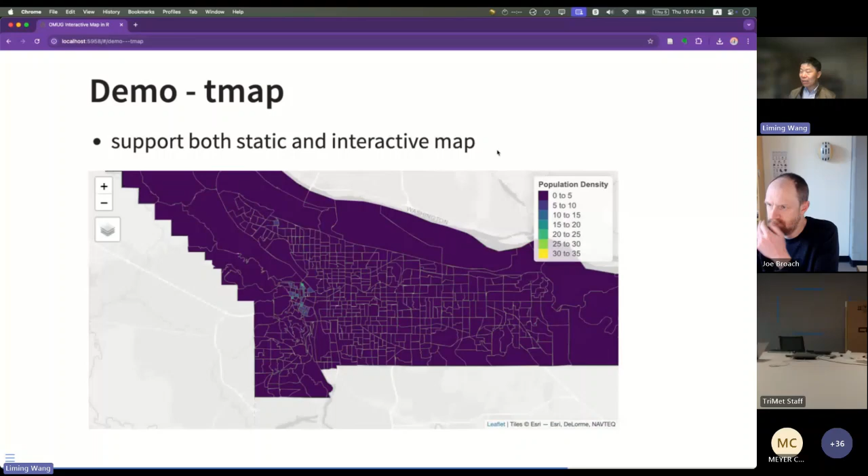The neat thing about TMap is that it supports both static and interactive maps. So this is an interactive map created using TMap, and then you can create a static map to include in your report, writing, and so on.

MapGL is the final option. It's a new kid on the block. It's pretty powerful in that it uses WebGL, so it's more efficient with larger datasets, but the syntax is a lot more verbose. Its creator is Kyle Walker, the same creator of tidycensus. Given his caliber, I believe this will be, it's still evolving, but given its caliber, I believe it will be a pretty powerful tool in the future.

So yeah, that's all I have. Give it a try. For those R users among you, I believe there are alternatives in Python as well.

Okay, with that, I'll give Cody a minute to share whatever you have. It looks like maybe you had a question from Joe. Joe, let's bring this offline since for lightning talks we promised we would not do Q&As, to reserve the time for the main part of the session. Go ahead, Cody.

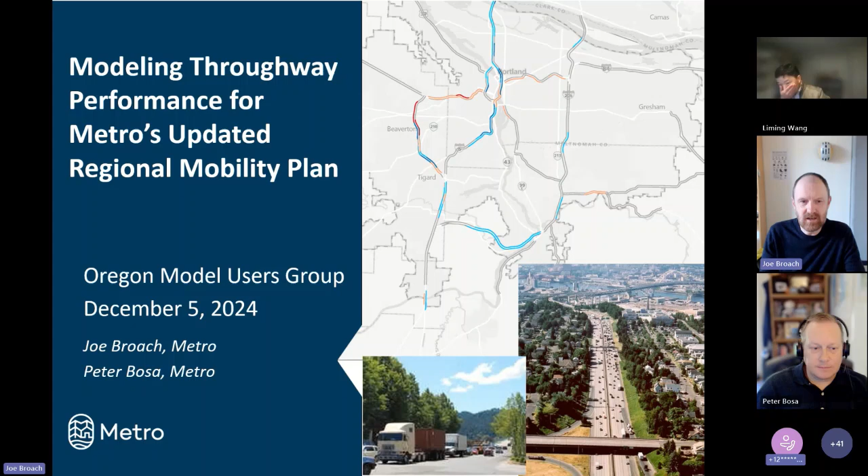It took this more flexible way of measuring our plan's performance. So just to overview what I'm going to talk about: we've developed this new speed-based highway performance measure, a bit of a departure from the past, and it's actually part of a package of regional mobility policy measures.

It's not the only criteria or even the dominant one, but it's the one that really depends on the travel model and other data for support. So I thought it'd be of interest to this group and those working in that area.

Another thing that makes this work fascinating is that it's one of the first times we've done a real fusion, a melding of big data sources via INRIX speed data and travel model outputs. I think increasingly this is going to be the direction we're going as modelers supporting planning and policy.

The cheerleaders of big data were often making the push that it was going to replace our old, outdated ways, but the reality is that they provide two different sets of tools usually, and often one is more suited to one thing than the other.

I think more often we're going to find ourselves triangulating and fusing data sources and our travel model outputs, and this is a great example of that. We really wrestled with it for quite a while to figure out how to make best use of both.

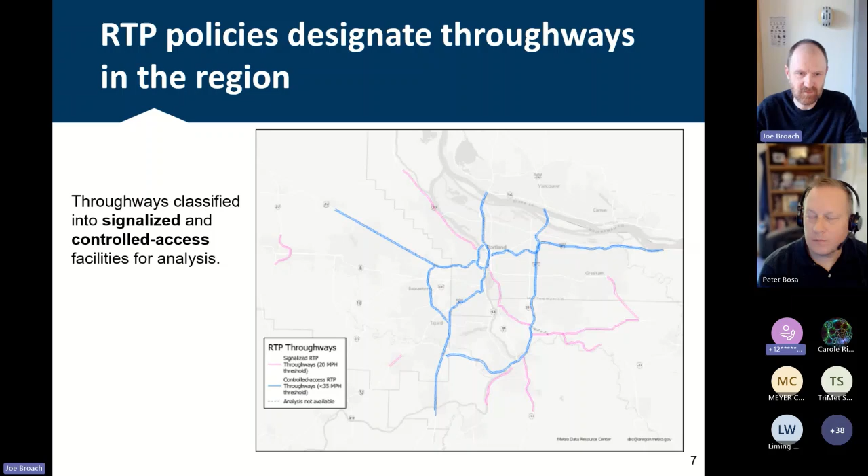The observed data, that's the probe data for those not familiar with it, is provided via INRIX, and it's attached to its own network, not our planning network. It comes on this kind of Byzantine traffic messaging channel network, the TMC network, that has its breakpoints based on where a navigation system would want to tell you to heads up for an exit coming up. But it's not the same as a modeling network for sure.

So we ended up calculating just the average weekday hours under the speed threshold for each of those TMC links, but the links still need to be aggregated for analysis. This was seen as too fine-grained, and also subject to quite a bit of missing data in the probe data, and also getting to be well below, I would say, the model's sort of threshold for being able to define speeds on a segment.

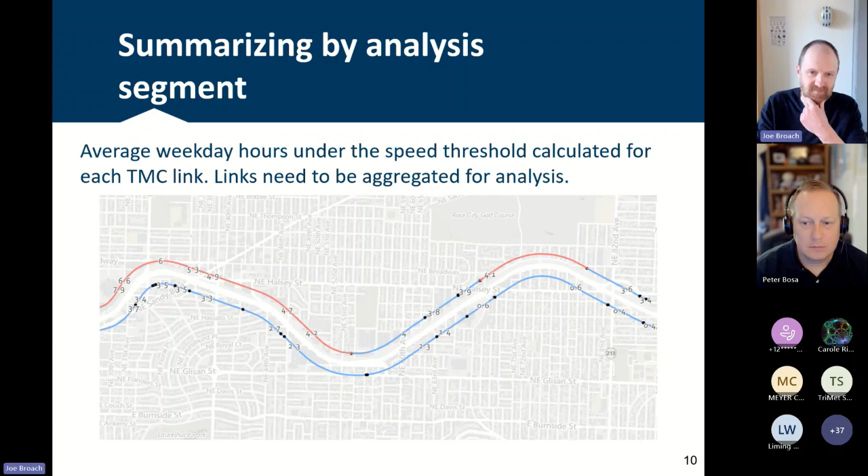So at first we started from the simple one, which was just freeway, the regional throughway definition, but these are very long, right? So that takes that and summarizes it basically all the way from 205 to the junction with I-5 east of downtown, and you would get a single metric by doing a weighted average of those hours under the speed threshold. In this case, westbound was not meeting the threshold - it was over 4 hours a day. Eastbound was, but that masks obviously a lot of variation along the way.

So we worked with ODOT and with our consultant partners at DKS, and we tested a pretty good list of different strategies to segment the network for analysis. In the end, we settled on a pretty simple one that was understandable, seemed defensible, and wouldn't require us to do too much tweaking over time. That was just to go off-ramp to off-ramp for the controlled access freeway facilities. It sort of makes some logical sense that those define analysis segments.

On the signalized throughways where you don't have ramps, then we typically would go major intersection to major intersection, but as I'll mention later, it's still kind of a process under development for those without access control. It's a challenge to normalize them - they're so locally dependent. So finally, to the punchline here.

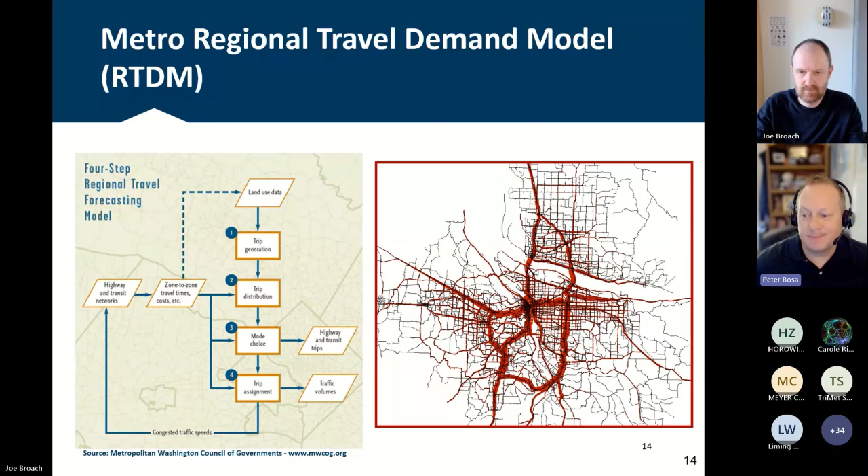So what are some of the limitations? I'm talking about the static assignment, but we refer to it as part of our regional travel demand model, so I'll just call it that, though really this is specific to the static assignments that are part of that model.

They only assign trips to whole hours, so all of our assignment periods are for an entire hour - noon to 1, for example. It's not possible to model something like 12:30 to 1:30 or 12:15 to 1:15. We're set up in whole hour slots, one hour for every 24 hours of the day, and we end up with averages for that hour for the entire link or segment we're looking at.

This makes it difficult to capture congestion that might occur over multiple time bins. For example, if congestion occurs in real life or in the INRIX data between 5:30 and 6:30pm, the regional model's static assignments might show 2 hours of congestion from 5 to 6 and 6 to 7, or it might show just 1 hour of congestion, either 5 to 6 or 6 to 7, or it may show 0 hours of congestion. So this is a disconnect we often have relying on these more aggregate tools.

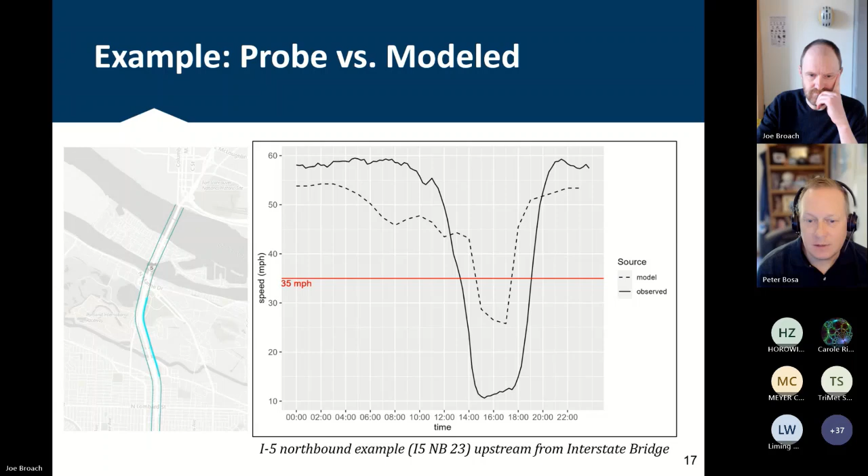Next slide, please. So how do we reconcile these differences into something that's meaningful in terms of evaluating how congestion may grow or change into the future?

And let's see, is that it, Joe? I guess I'm passing it back to you.

Don't say that's it. That was a lot, but yeah, thanks, Peter. Yeah, I'll toss it back, and I'll watch the time here. I want to be sure we have some time for Q&A, so I'll just give you some quick hits from some of the initial results of our first time really running this region-wide in the way that Peter just set up.

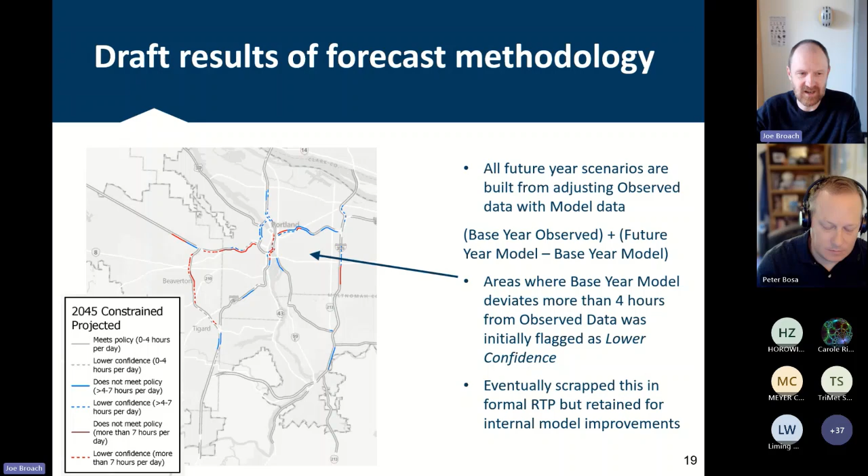So I will proceed through. Just from the observed probe data, you can see this is its view via this performance measure of Portland's throughway weekday reliability, where you see the colors, the blue or the red is more intense. Both of those, though, are not meeting that policy. They're more than 4 hours a day that the speed falls below our threshold. The gray roads, which I know are a little hard to see here, are meeting that threshold.

Doesn't mean performance is perfect, but as you see, this is doing a better job than that sort of pegged volume to capacity fuel gauge that we had in the past. So it was good to see it's in the range of the measure, the conditions we're actually seeing, which is more useful to policy. This is just a chart version of a system-wide summary. So we also did some system-wide summaries just to understand the measure and conditions, and you can see by scenario a sort of percentage of miles in the regional throughway system that were not meeting that performance criteria, no more than 4 hours a day, where the speeds are falling into that unstable range.

Focusing on these orange bars, which are the controlled access facilities, you see it starts at about 20% of the mileage in the regional network not meeting that criteria, and of course it grows in the no-build scenarios, from a combination of model and observed data, to around 45% in the 2045 no-build scenario.

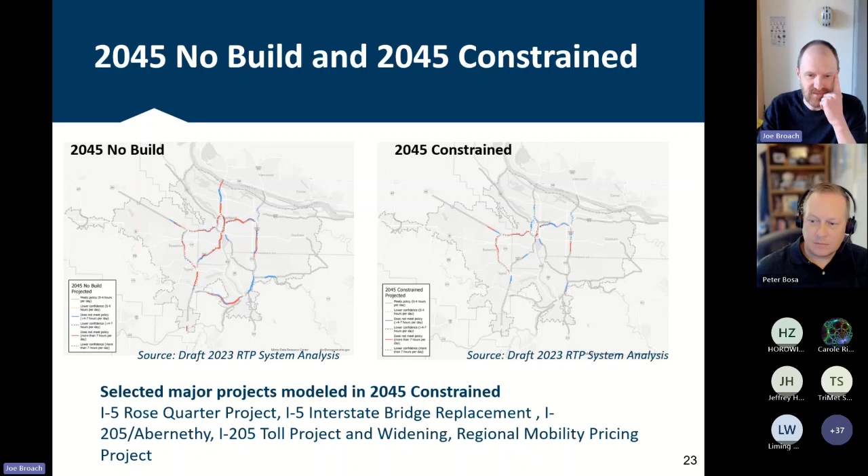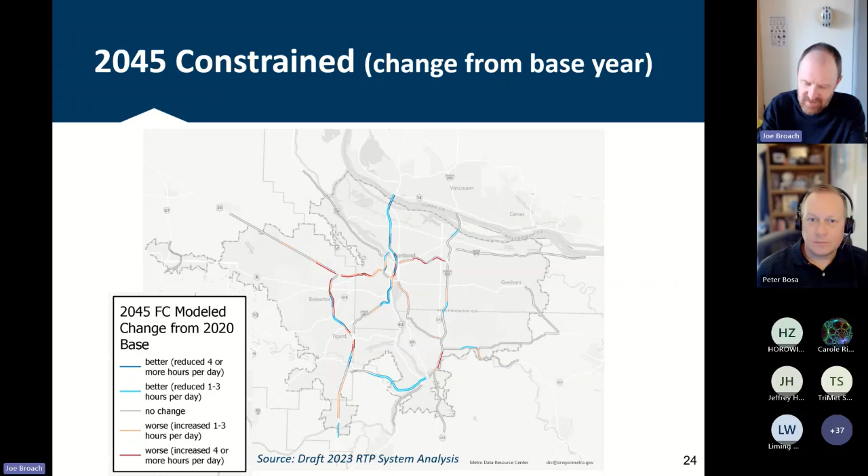But sometimes it's helpful to just focus on the delta—is policy pushing it in the right direction, even if we're still not able to meet where we would like to be. This final point before I open it up to thoughts from the room: we're feeding this back in, putting it on our wish list for model improvements.

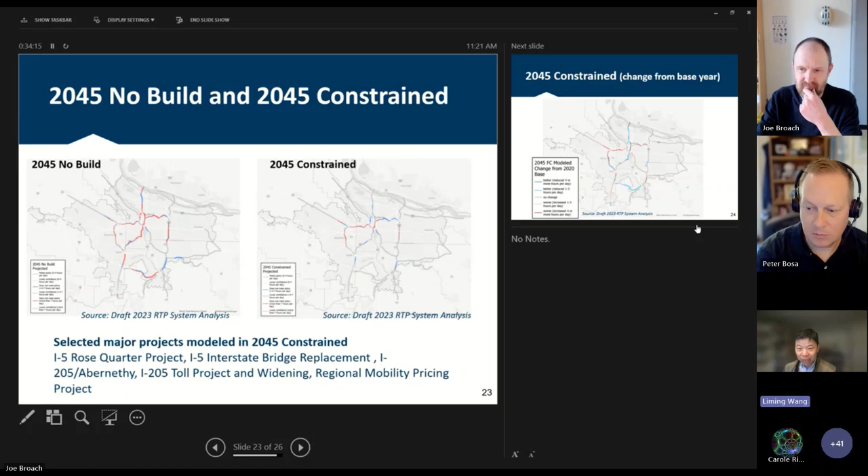So our next presentation is about CFEC, climate friendly and equitable community, VMT performance measure. Zachary will share an example application of the CFEC VMT performance measure, using a travel demand model, along with an overview of the VMT calculation methodology. Zachary Horowitz, PE, is a transportation analysis engineer with Oregon Department of Transportation's Transportation Planning and Analysis Unit.

His professional background includes designing, analyzing, and managing a wide variety of multimodal traffic engineering, transportation planning, and transit projects for public and private sector organizations across the U.S. In his current role at ODOT, Zachary helped Oregon's metropolitan areas implement Oregon's new CFEC program per Oregon's transportation planning rule, including working with a broad group of public agency stakeholders to develop new CFEC modeling guidance for Oregon. With that, I will pass on to Zachary.

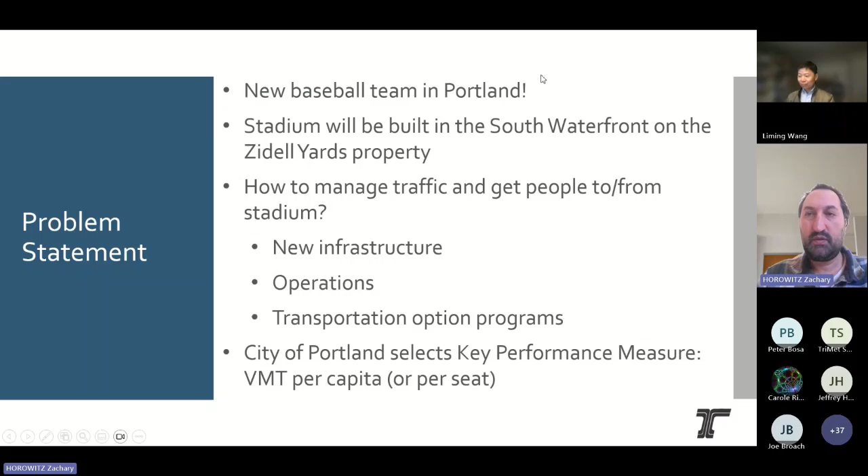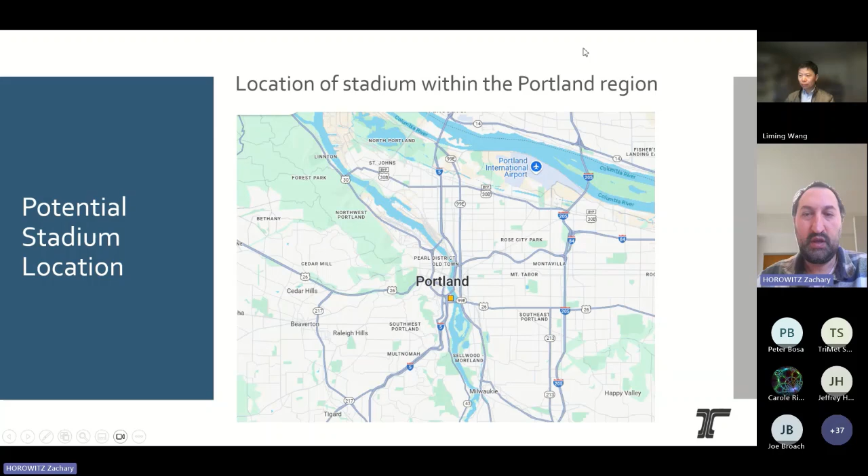So some givens here, just a little bit of the context of where everybody is. Here's our Portland region. This small orange dot is roughly where the stadium would go, or is currently being proposed. The Oregonian had this really great series, at least online, of all these different stadiums shoehorned into this tiny little site, which is bounded on the east side by the Willamette River, on the north by where the Orange Line and the Tilikum Crossing cross the river, the west side is Interstate 5, and on the south side is the Ross Island Bridge, US 26.

A lot of the South Waterfront OHSU development is further south. I don't know exactly how we're going to get a stadium in here, but this has sort of been the proposal. Thankfully, Portland is one of the smaller markets for this, so maybe we'll be able to get it in. But we're going to go with this for the time being.

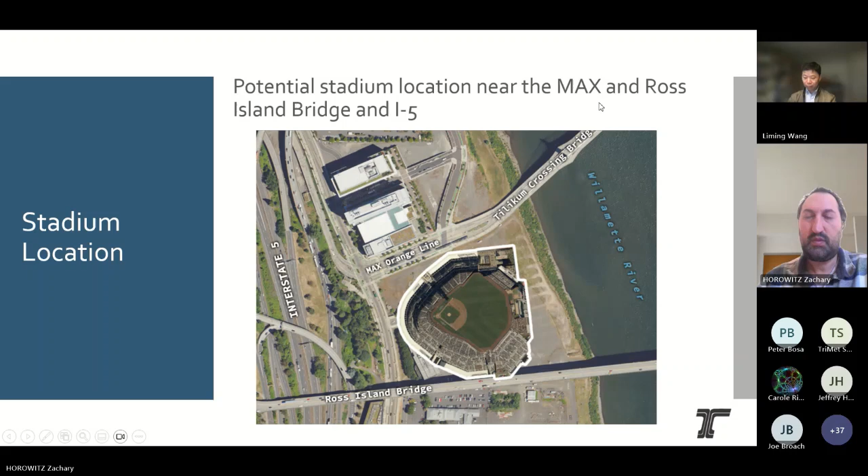I took a look - most stadiums for a city size of Portland hold between 5 and 40,000. Baseball has 162 games a year, so 81 home games - this is not preseason or postseason. With a stadium this size, we're definitely going to be able to get Taylor Swift and some of these other concerts that seem to miss Portland because we don't have a large enough venue. So this is something that's going to be used not just 81 plus times a year, but maybe 120, 150 times depending on what we're doing.

We know as travel modelers, a stadium certainly constitutes a special generator, and it's creating new demand, both locally in the Portland area, regionally within the Portland metro area or Vancouver, and even possibly statewide travel demand, because there's only so many baseball teams around, and people that live in Medford now have to travel to San Francisco to see the closest game, or be able to come up to Portland.

Because of the tight location, there's not going to be a lot of opportunity for major infrastructure development in terms of widening highways or adding new interchanges. It's a pretty tight location. If you think about some of the other spots, whether it was the Lloyd Center or the Red Tail Golf Center, these are major questions in terms of being able to get people to and from.

And maybe my largest assumption here is that we're going to have alignment across all the different jurisdictions, whether this is Portland, Multnomah County, Oregon, or Metro, that we're selecting VMT per capita or VMT per seat as our performance measure. That's going to be the number one thing we look at when we look at a number of scenarios for measuring travel to and from the stadium.

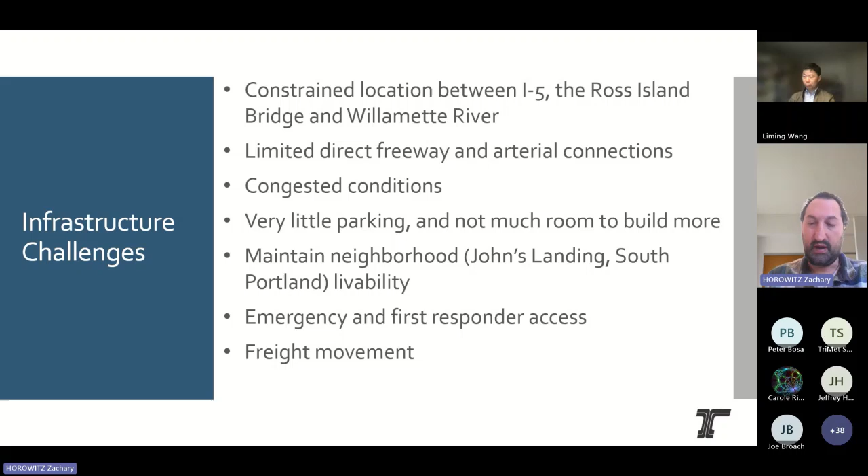Obviously, through the development process, maintaining emergency first responder access is a key requirement, and clearly freight movement, whether we're talking about bringing concessions to the stadium or getting Taylor's concert set up, is a key consideration.

On the flip side, we have a lot of opportunities and a lot of mobility assets, which is part of the reason this site was selected. So the Tilikum Crossing, this non-motorized bridge over the Willamette that carries all those different modes. We have a higher capacity transit system, whether it's bus or MAX. We have the tram, and obviously this is an area that has lots of great pedestrian and bicycle routes.

There's micromobility options. We have opportunities for some sort of park and ride, whether to use the downtown parking garages or even sites elsewhere, possibly on the east side. And even though we don't have necessarily direct freeway connections, we have a lot of connections close by, again mostly in downtown. There's opportunities for the transportation network company. Maybe we could set up a water taxi. There's lots of different things we can do.

And again, part of the challenge that would come to evaluate this is how do we incorporate all of these things into the travel model, or even can we?

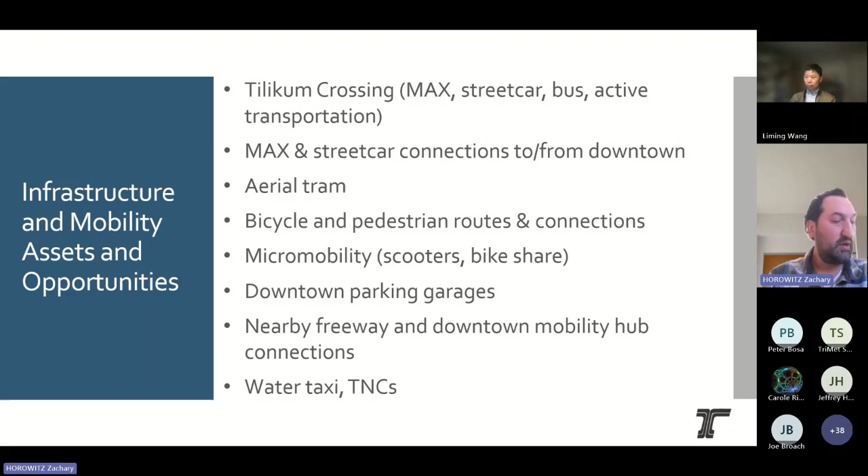So we know that our travel model can definitely cover the local and regional access. But when we're looking at longer distance travel, people coming from the southern part of the Willamette Valley or elsewhere in Oregon, are we going to be able to model this? Is this something that the statewide integrated model can be a part of the project to do?

Transit, again, something that's part of our travel model already, we can do that. We need to look at different ways of incorporating those capacity and operations. We have pricing policy, whether it's parking, is there a cordon pricing measure we can do to get into the zone as a way of really reducing the desire for vehicles to get there.

Elsewhere in South Waterfront, again, these folks can walk or bike to the stadium. That's going to reduce the amount of travel needed. There's always the potential for mixed use and freight movement, which of course is limited. And there's also these travel option programs.